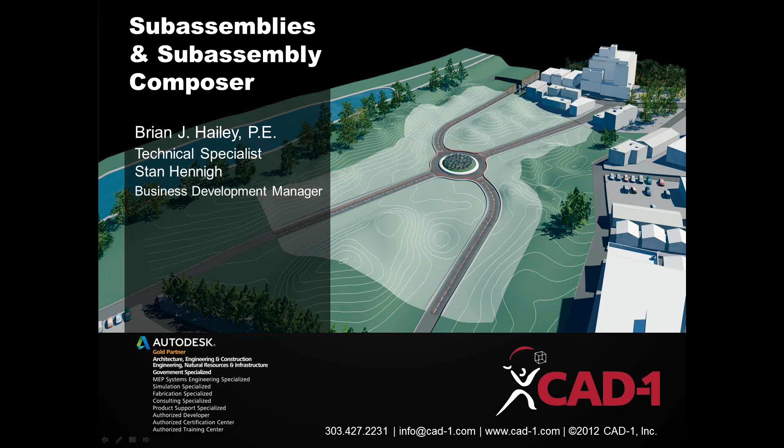That's right. So we're going to get started here. We have a few housekeeping slides to get us started, and then we will jump into the heart and soul of things.

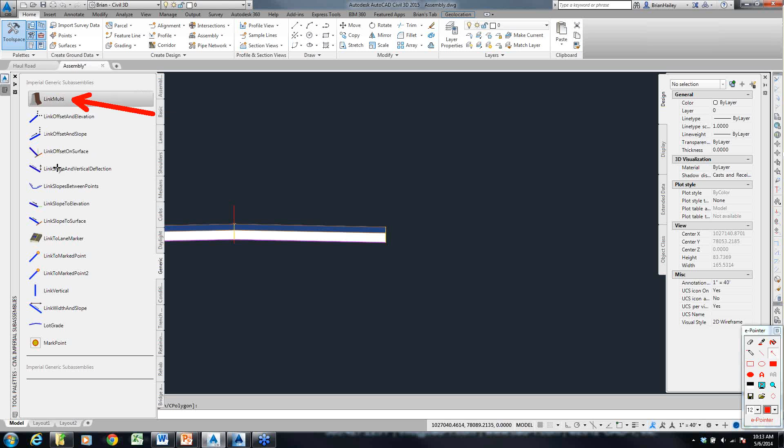So on your tool palettes, on the generic tab, what we have is the multi-link subassembly. This one's pretty cool. Let's see. So I select it. Over here in my properties, I basically just tell it how many links I want, and then width and elevation, change in width and change in elevation for it. So I'm going to put in 6 links. This is how my berm is going to look. I can type in the codes and things like that. And then, honestly, I just put in my first one.

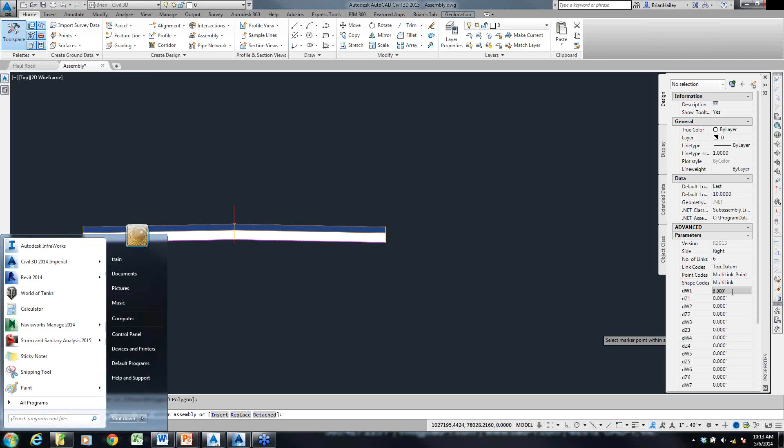So this is going to be 6 foot wide by 6 feet. Come on. By 6 feet tall. And I'm going to finish putting the rest of these values in after I attach it to my assembly, just so I can see it. So I'll go ahead and attach that off the edge of the lane. And so there's a 6 foot wide 1-to-1 slope. Now that I got it in here, I'm simply going to grab it and start making some changes here.

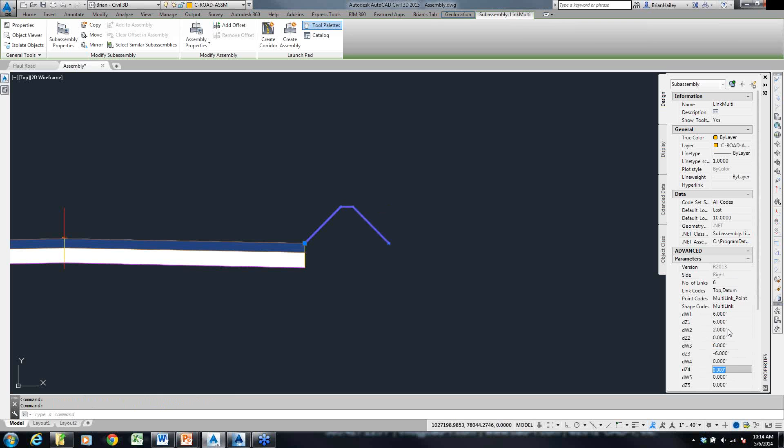So the top of the berm, I want to be 2 feet wide. All right. The next one is going to be 6 feet wide and go down 6 feet. And now I want to go straight down, so I'm going to go offset of 0. All right. Oh, sorry. Offset of 0 with a change in elevation of 4 feet. And then I'm going to go back. So I went over 6, then 2, then 6. So I'm going to go back

14 with a change in elevation of 0 again. And then I want to go back up the 4 feet, back up to where I was. And I did, oh, that was wrong. That should have been 0. Sorry. That one should be 4.

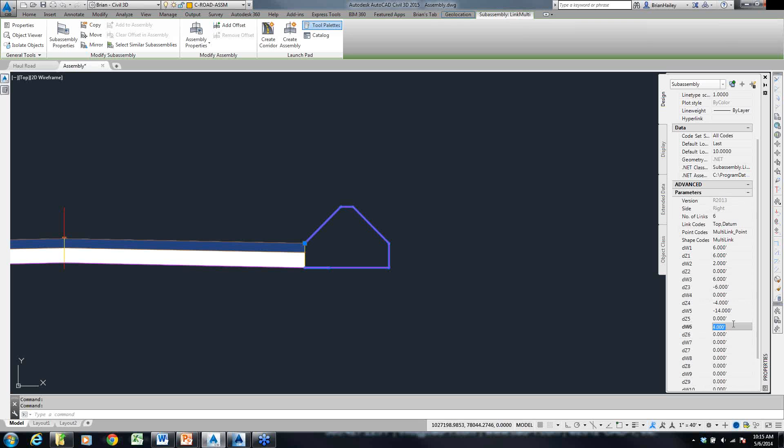No, that one should be 0. That one should be 4. There we go. And once I get back to the beginning, you can see it fills in the area with the shape. So this is one method of creating an odd-shaped subassembly. It's pretty straightforward, nice and easy.

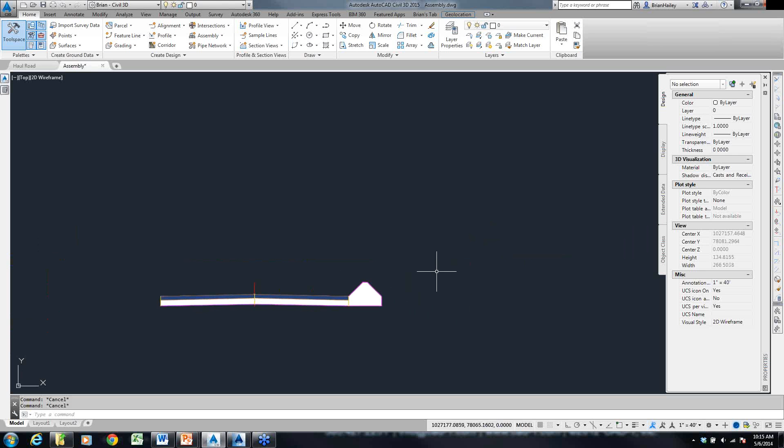I'm going to show you another way real quick. So another way is I can simply draw a polyline. All right, so let me go ahead and draw my polyline in here.

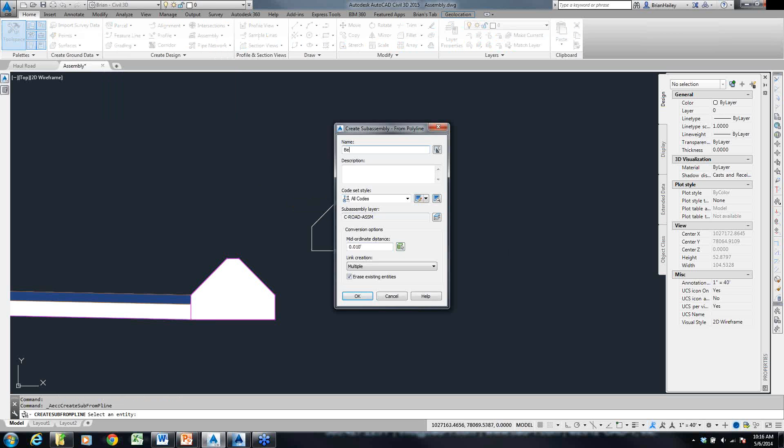All right, so I got this polyline here. It's just a polyline. It basically represents the same thing. And what I'm going to do is I'm going to make this into a subassembly. So on the Home tab, Create Design, I can create a subassembly from a polyline. All right, grab the polyline. You get some options in here. I'll call this one berm or whatever you want to call it. And now it's a subassembly.

Now, when you're doing the subassembly from the polyline, you have to go in yourself and add in all the codes. Oh, and besides that, you can see that the attachment point is right there. No. It needs to be over here. So I'll go modify the origin, make sure it's at the right spot, and then I can come in here and I can start adding codes to this.

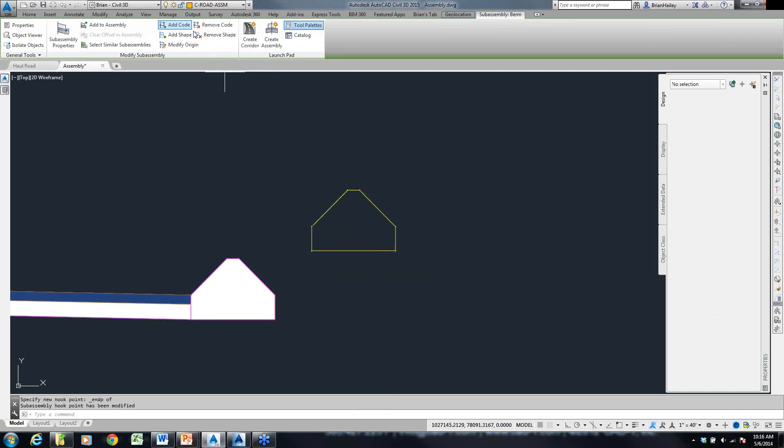So along the top is going to have the top code, so I'll call this the top code, and I want that link there to have the top code. And then I want this link to have a top code, and then I want this link to have a top code. And then I could also add point codes and things like that.

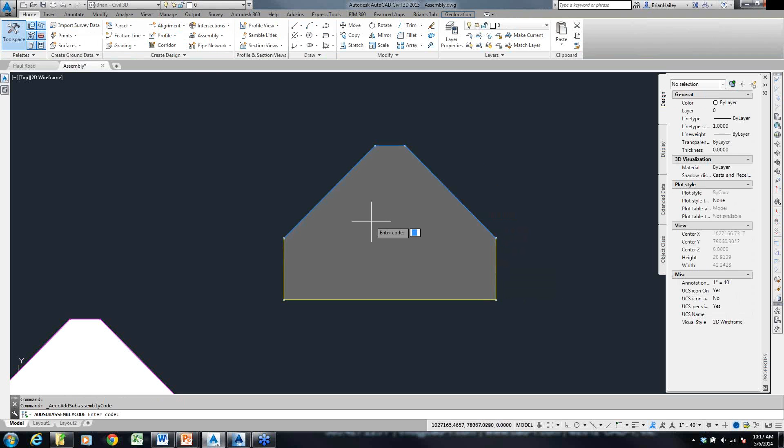I want to put a shape in here, so I can tell it, hey, I want you to have a shape. I select the links that form the shape. And then I can add a code to the shape as well. So this would be dirt. I know that's not a good code because technically it's not dirt, it's soil. All right. And now if I go into the subassembly properties under the codes, you can see I've got my top code. I don't have any point codes because I haven't added any. And I've got my dirt shape code.

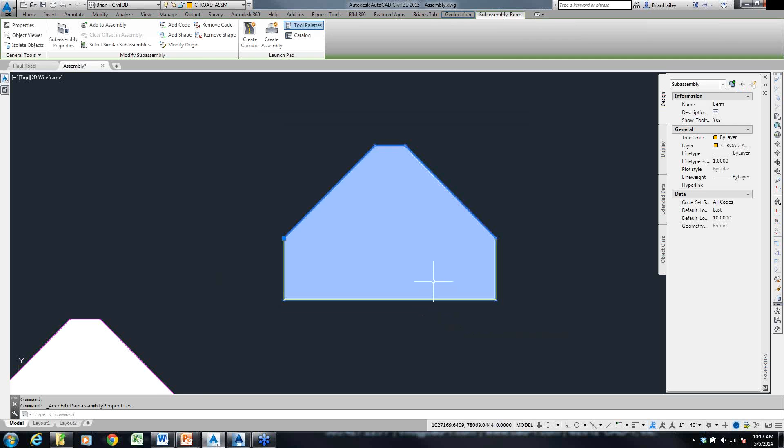Right. No, I don't refer to it as cement. Cement is an ingredient in concrete, even though I do refer to dirt as dirt.

All right, so there's a couple of different ways of creating subassemblies. Again, these are real quick, real easy. The next method is just to use your generic links.

I was hoping you'd name your subassembly Joe. Call it Joe Dirt.

So I'm going to use generic links. So I'm going to come over here to the other side, and I'm just going to use a link width and slope. All right, so my width is going to be 6 feet. My slope in this case is going to be 100%. And I'll attach it here.

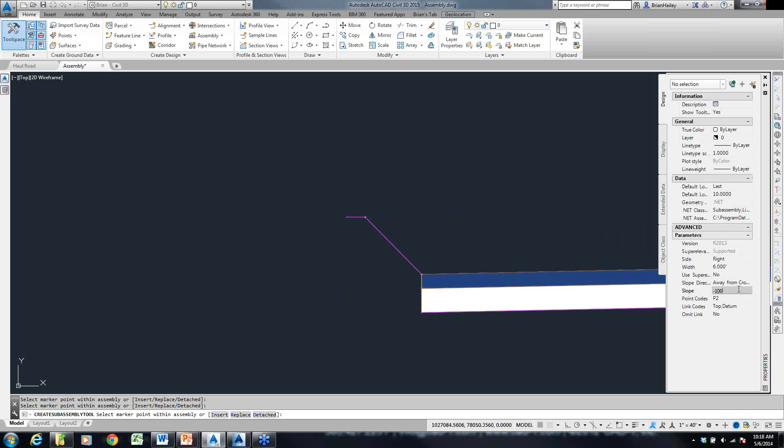And you can see I can simply start building out my subassembly. This is going to then be 2 feet with a slope of 0. And that attaches right there. And then again, we'll go 6 feet with a slope of minus 100%. And so I can start building out my subassemblies. Now, there's advantages and disadvantages to all of these. Let's talk about some of those.

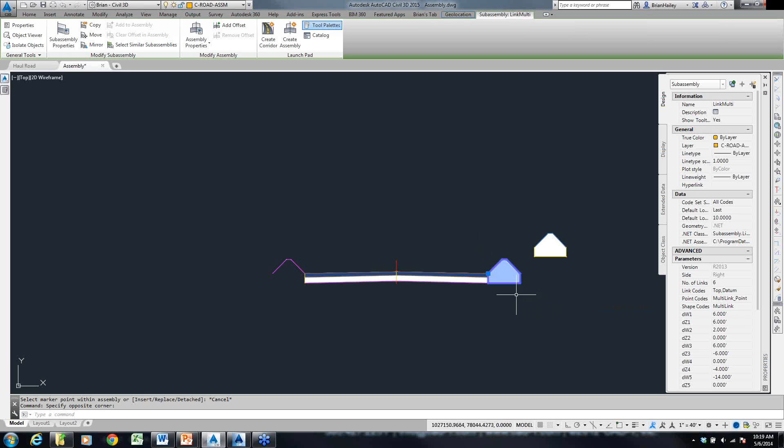So here I've got the multi-link subassembly. The advantage to this one is it's really easy. A disadvantage is, well, it only has one set of codes. So all of the links have the same code. All of the points have the same code. I can't put in multiple codes. I can't define this is top and this is datum because, well, they're all going to be the same. So that's the disadvantage of it.

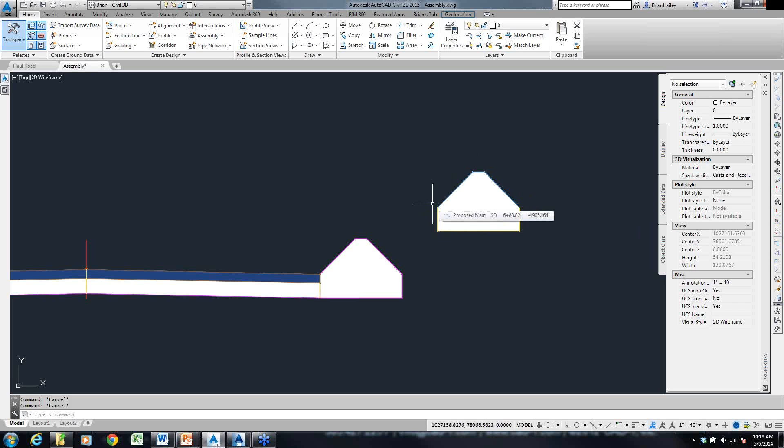Here's the one created from the polyline. The nice advantage about this one, again, it's easy. The other advantage is I can put multiple codes. I can assign different codes to the different links and the different points in this case.

Right. The main disadvantage to both of these, both the multi-link as well as the create from polyline, is they're not parametric, which means they can't change. So if I need to make the top wider in certain areas, I can't do that because they're static. They're not parametric.

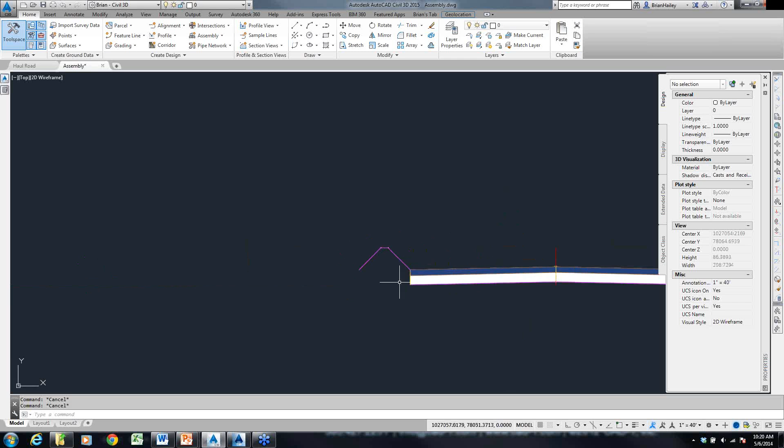The advantage to the generic links is it's fully parametric. I can change widths and elevations and all sorts of fun stuff like that. Disadvantage, I can't put a shape in here.

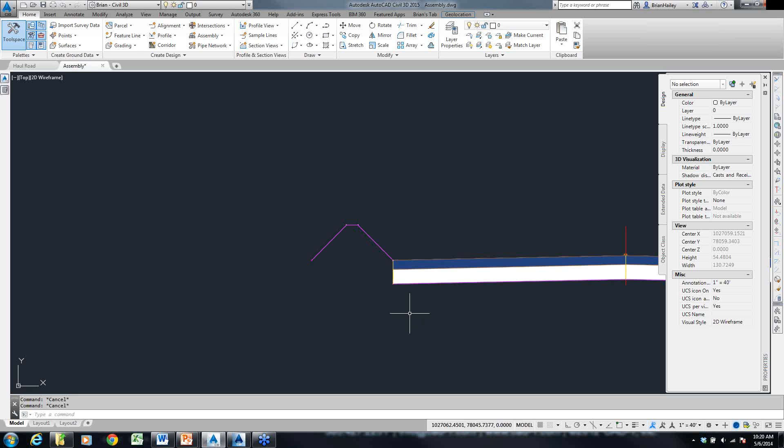And Brian John has a question here. What if your subassembly is double shape, i.e. below is a subbase when using a polyline? So, John, the question, I believe, is what happens if I wanted another piece underneath here? I have quick yes or no?

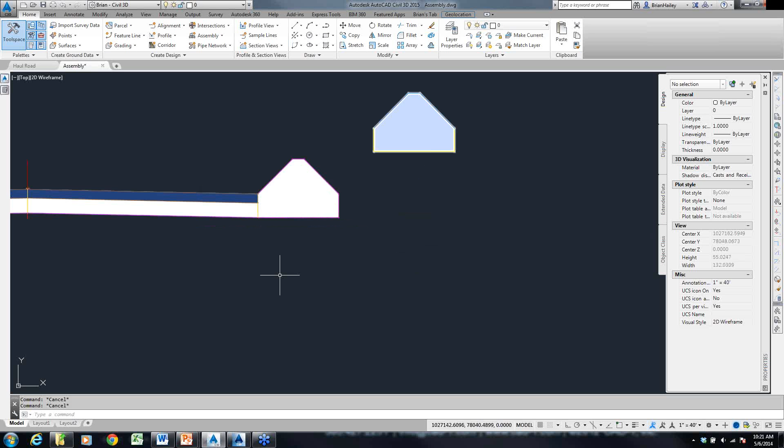All right, so that would be another subassembly in this case. So I'm creating it from a polyline. A polyline can't split. So I'd have to create a sub-base piece under here as its own subassembly. Good question, though. So that's another disadvantage to it. The same with the multi-link. It has to be one enclosed area, I believe. Never tried it otherwise. But again, the disadvantage to using the generic links is no shape areas.

Okay, we got another question. Hang on, let me read it here real quick. Okay, Jeff asks, I want to create a basic lane so that the slope from center out will tie into existing surface. I want the lane to show up as shape in section as a solid. And then, yeah, we saw that, but we won't hold it against you, Jeff. I want to create a basic lane so the slope from center out will tie into the existing surface. I want the lane to show up as a shape and a section as a solid.

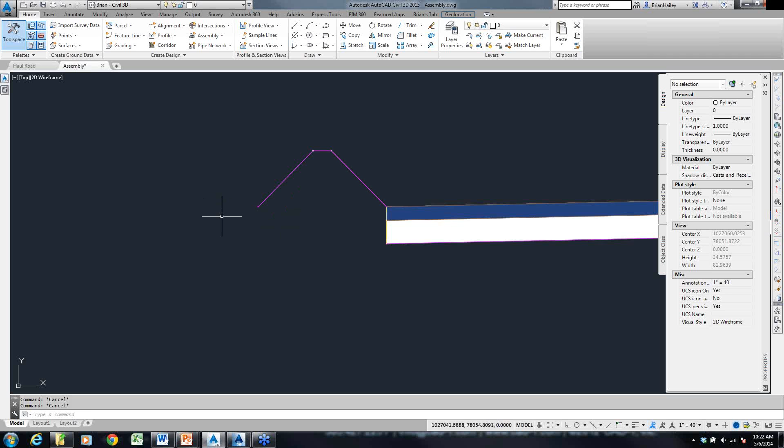So in that case, Jeff, what I would do is I would just use your basic lane. And then I would also use a link to surface. And you can get an output from the link to surface and use that as an input to the lane. It's a little bit outside the scope of this discussion, but it definitely can be done. So if you go into your assembly properties, just real quick, let me show this. All right, on your construction, you have output values. So you can get a slope and a width from an output value and use that as the input value for a lane.

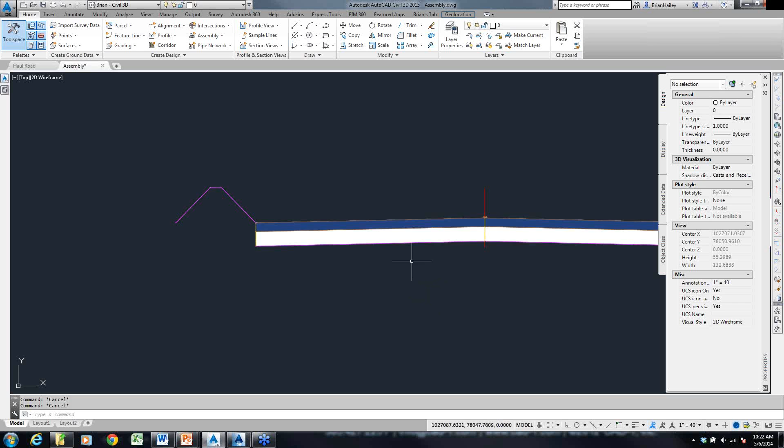So, all right, let's hold off on questions here for just a bit. Let me get into a little bit more. Go ahead and type in your questions, and we'll address them in a minute or two. So if you ask a question and I'm not answering it right away, just don't hold it. Nothing personal. He is ignoring you. He's that way.

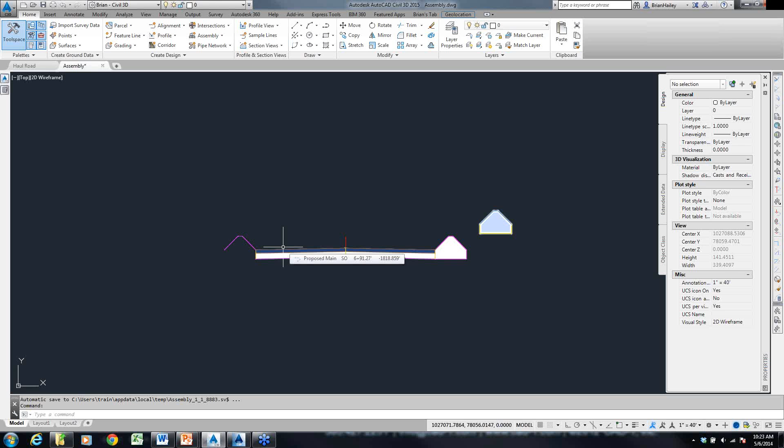All right. So here are just basic in the drawing, no subassembly composer. I want to create some subassemblies. Now, what I'm going to do is get into the subassembly composer. It looks scary. It's foreign. It's weird. It's odd. It's a flow chart. That's really all it is. You start at the start and you work your way through. That's all there is. So in this case, I'm going to do something a little bit different with my little earthen berm there. So I made up some criteria for it.

So here's the criteria. If I'm in a fill situation and it's less than 2 feet of fill, well, let me put it this way. The minimum height I want on this berm is 2 feet. The maximum height I need is 6 feet. If I'm less than 2 feet of fill, I just want to put in a 2-foot berm. If I'm more than 6 feet of fill, I just want to put in a 6-foot berm. But if I'm somewhere in between, I want the height of the berm to be the same as the depth of fill. So if I'm in 3 feet of fill, I want the height of the berm to be 3 feet to give me a little bit added protection for that severe drop-off.

I know it's maybe not so much a realistic real-world application, but I think this is a good example of how these tools work. So if there's any mining engineers out there, please don't actually design this way, because I just made this up last night.

All right, so basically what I'm going to do here is I opened up Subassembly Composer. It opened up a new subassembly. The first thing I have to do is tell it what it is. So on my packet settings down here, I'll give it a name. I don't want this to be Subassembly 1. I want this to be Haul Road Berm. Give it a name.

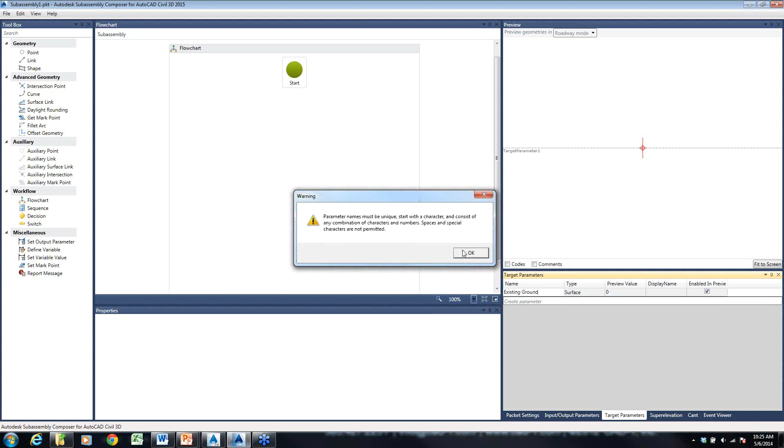And then, let's see, I got some target parameters. I need to be able to target the existing ground in this case. So I'm going to create a parameter, call it, say, existing ground. And it's a surface, existing ground, no spaces. It's a surface, and my preview value here is going to be, say, 4.5 feet. So about halfway between the 3 and the 6, right? Oh, sorry, minus 4.5. And you can see up here in my little preview, I've got my assembly, and then I got the existing ground.

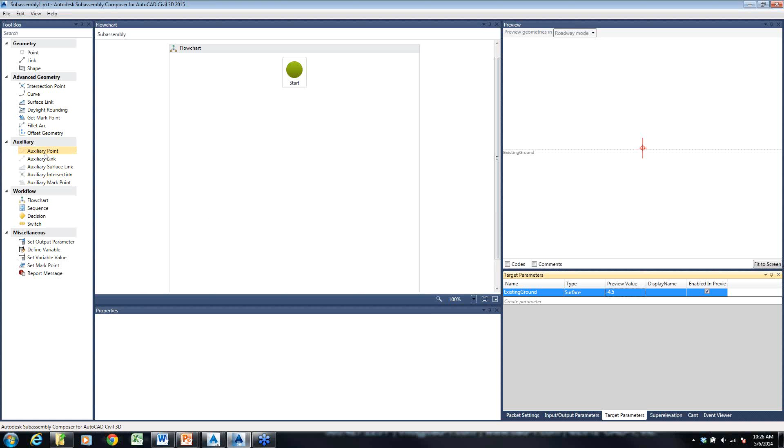So now what I want to do is I basically want to calculate the depth. How much fill am I in? So the way I'm going to do that is I'm simply going to use auxiliary points. Auxiliary points are just points that are out there that I can use for calculations. So I just simply take my auxiliary point and I drag it in. Auxiliary point 1 is going to be right there at the origin. Auxiliary point 2, and you can see it's making that flow chart for me, is going to be from auxiliary point 1. And it's going to be a delta x on surface. What's my delta x? Well, 0. I just want to see it on the surface.

All right, so if I come over here and I zoom in a bit. Oh, sorry. What did I do? Oh, I got to set my target surface. It's going to target the existing ground. So you can see I've got auxiliary point 1 and auxiliary point 2 with this link. So that's going to allow me to do math. I said math. It's cool, right? So what math do I want to do? Well, I want to know the depth here.

So what I'm going to do is I'm going to define a variable. All right, what is this variable going to be? Well, it's going to be the distance from the y value of AP1 to the y value of AP2. So my variable type is going to be a double. Again, that's a number. And my expression is going to be AP1.y minus AP2.y. So what's the elevation difference between these 2 points? And I did something wrong. Oh, no, I'm sorry.

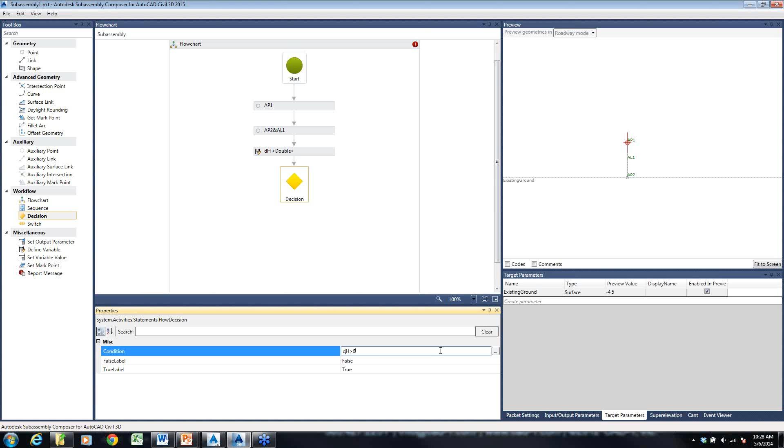So what is the decision? Well, the first decision I want to do is the elevation, is this DH more than 6 feet? So the condition is DH is greater than 6 feet. All right, and then I got a true and a false. So as I mouse over this, you can see I got a true branch and a false branch. It's a flow chart. So let's see, what do I want to do here? And I just start building this out.

Now, the way I'm going to do this here is I'm actually going to put in another variable. I should have done this before. All right, I'm going to go put in another variable here. I'll just define another variable. I want it to be between here. Now, what it did is it went from the true up to here. I don't want that. I'm going to reconnect some of these things. I can just erase these, and then I want to go from there.

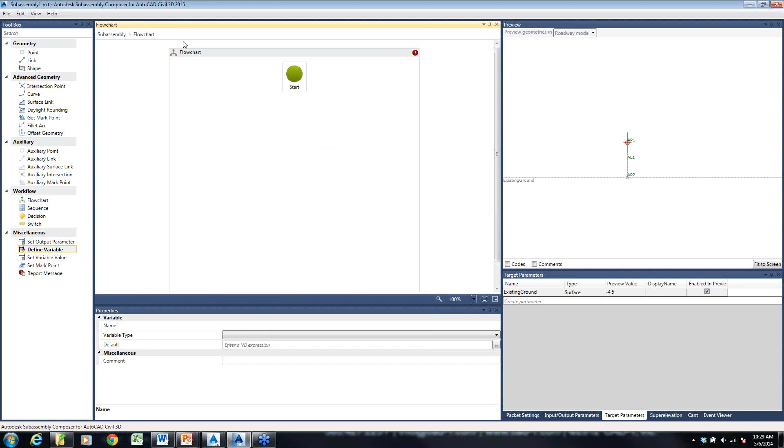Go from there to there, and then I want to go from this variable to my decision. This variable is going to be berm height. Variable type is going to be a double, and my default is going to be 6.

So if it's that, I'm setting the value here. If this is greater than 6, well then I don't really need to do anything, but actually let me set a variable if it's true. If the variable, just to make sure, I want the variable to set is berm height, and I want it to be equal to 6.

If it's false, I want to put in another decision. So I'll get rid of that, and then I'll connect the false to the input here. And I can always rearrange these and try to make them look a little bit better maybe.

So again, in this case, my decision is going to be, is DH less than 3. If DH is less than 3, again I'm going to put in a variable. And this time the variable is going to be berm height, and it's going to be equal to 3.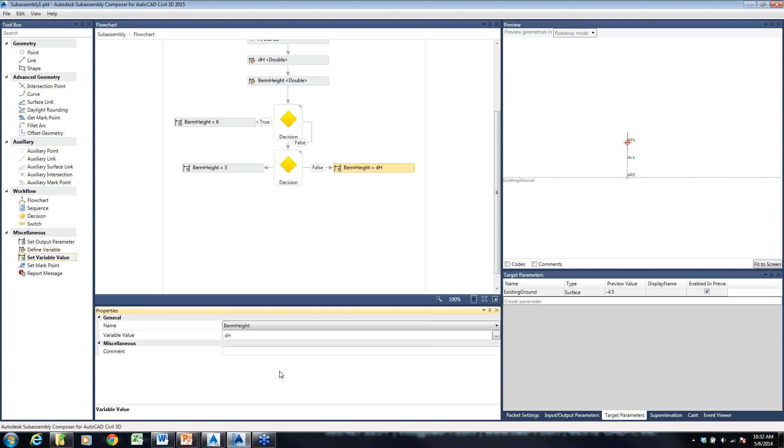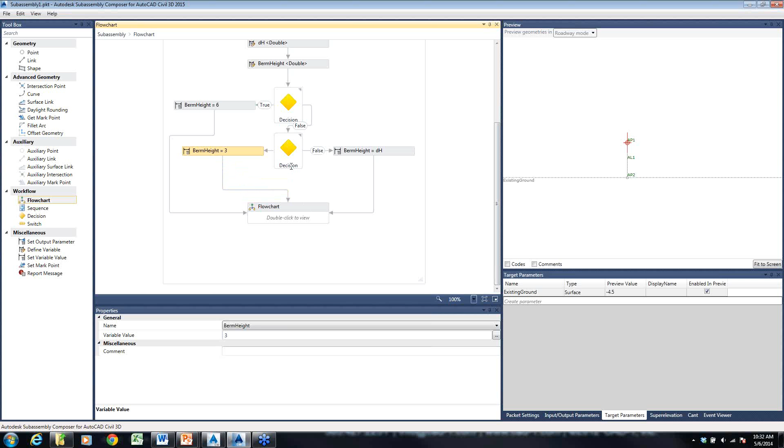Now I've got everything set up, I can now go in and define the actual geometry. And the way I'm going to do this is I'm going to put in another flowchart, just a simple flowchart. Now I want all 3 of these to connect here. So I'm going to grab this one, and we'll connect to the flowchart here, and we'll connect this one. So no matter which path I go, I end up here, but I end up here with different variables.

So now within the flowchart, I simply start putting in my geometry. So I'm going to put in a point. Where is this point? Well, it's going to be at the origin. I put in another point, and as I drag in the next point, this is now going to include a link. And down below, what is my delta x going to be? Well, I want it to be equal to the berm height.

I want to go over 6 feet, up 6 feet. So my delta x will be berm height. There we go. And again, over here in the preview, we can see it starting to work. And my delta y is also going to be berm height.

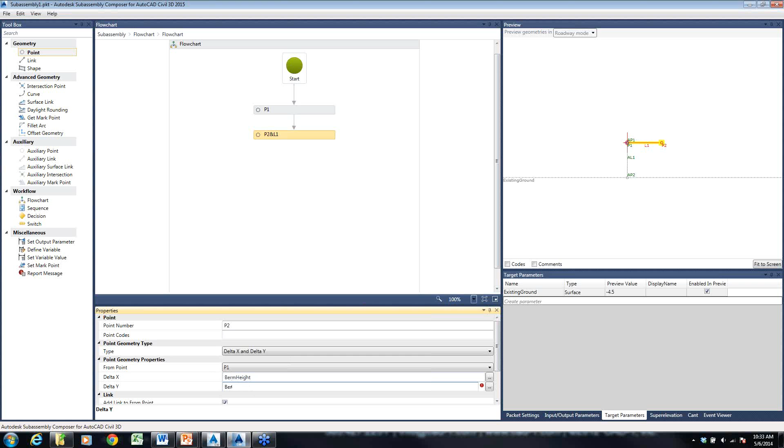Put another link in. I want this to have a 2-foot top, so this delta x is simply going to be 2. Put in another point, and I just start working my way down. This one, the delta x is going to be berm height, and the delta y will be berm height times a -1. All right, now this is where it gets a little fun.

I want to come down my base depth. So I created this base depth input parameter. I want to come down that distance. Now, what happens if they put in a positive number or put in a negative number? Well, I don't care which way they put it in. I want it to always go down. So for my next link, again, I'm going to do some math. And I even actually get to type math, so this is awesome.

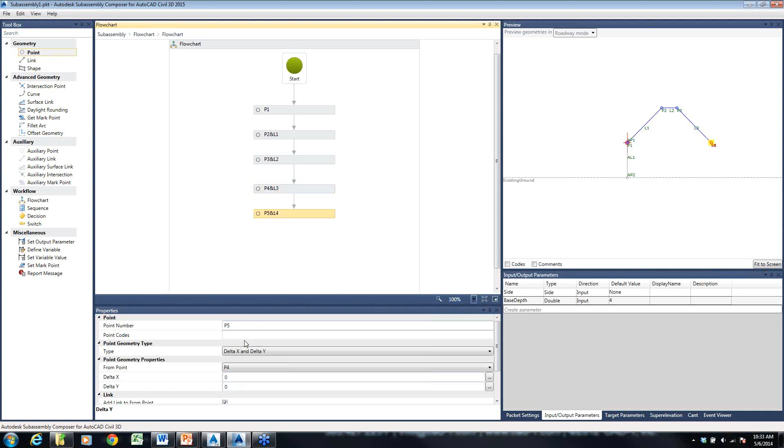All right, so my point 5, my delta x is going to be 0. My delta y is going to be math dot absolute value of base depth times a -1. So no matter which direction I typed it in, I want to take the absolute value of it, and I want it to go down. And it goes down the deep 4 feet in this case.

And now one more point. This is going to represent coming back over to this side. This delta x is going to be 2 times the berm height plus 2. So it's going to be berm height times 2 plus 2. Wrong way.

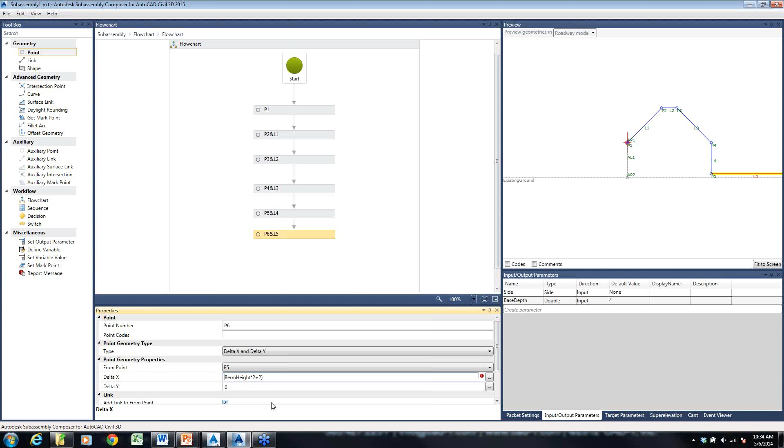Times it by negative one. Now all I want to do is put in one final link, and that'll connect back up to the beginning. So this one I want to go from point and go back to the beginning. So there's my links. Now I can go through and put codes and all sorts of fun codes on these.

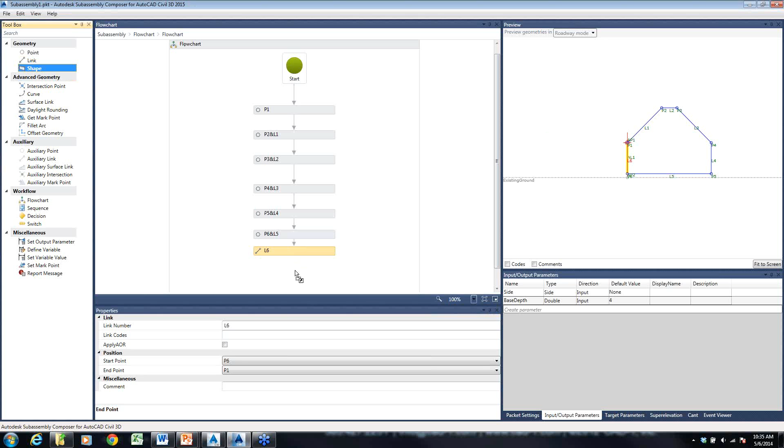One last thing I do need to do is I do want to put in a shape. And this shape is going to be composed of this area right there. So I click that point, and it allows me to put in my shape.

Now, how's this going to work? If I change the existing ground here, I can actually take this and drag it up and down. As you can see, as the ground gets deeper, the berm gets higher until I reach a certain point, and it stops. As I start moving up again, the berm gets lower until, again, I reach a certain point, and then it stays at that minimum height.

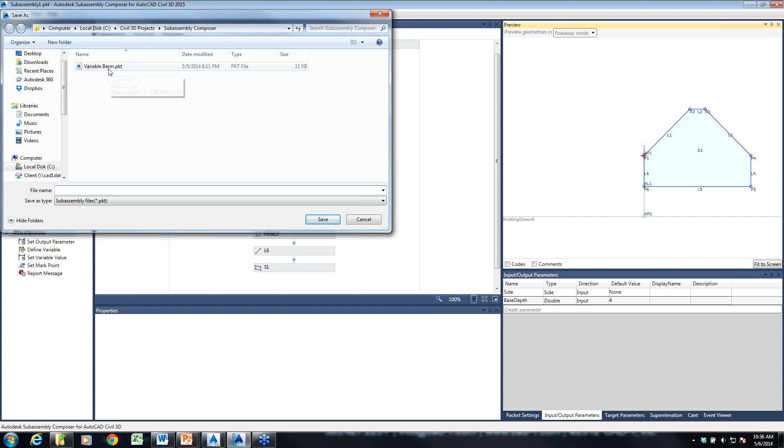So let's go ahead and take a look at this actually in Civil 3D now. Oh, sorry. First of all, what I have to do now is save this as a PKT file, as a packet. So I do a save as, and save it as a packet. I've already got this variable berm packet in here. This is the one I'm going to use in Civil 3D.

So now I'll come over to Civil 3D. I've got this nice haul road, and here is that subassembly brought into Civil 3D. And what I did is I threw in a couple of conditionals, to make sure that this is only put in a fill situation.

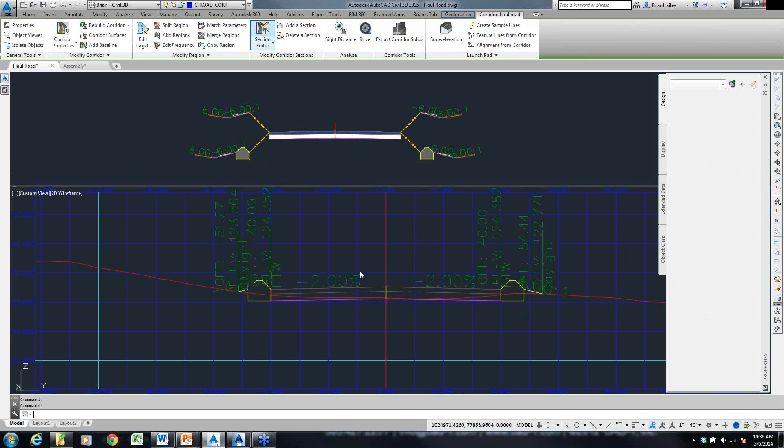I'll come down here and take a look at my section editor. As you can see, here is the berm, and what I'll do is I'll make sure I'm always zooming to this offset and elevation. And as I step through...

Must be going the wrong way. There we go, that is the other side. Let's take a look at the other side. I think the other side works better.

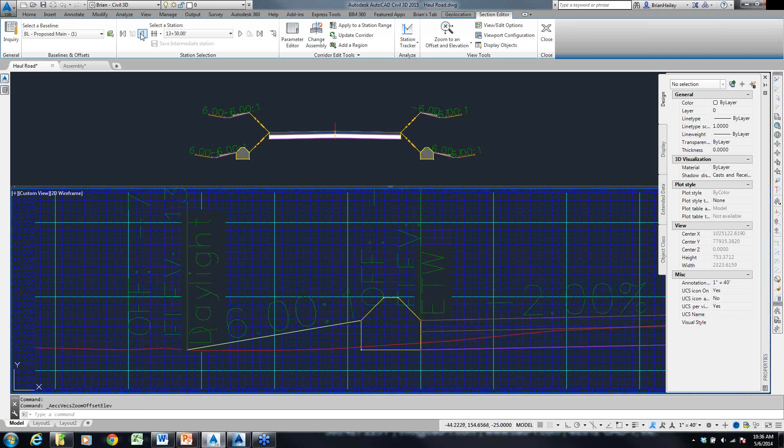As I go through the section here, you'll see that berm get bigger and smaller. As it gets more fill, you can see that berm start to grow out. It doesn't seem to be real obvious here.

Let's go ahead and close out of this. I thought I had this a bit more. Let me do something here real quick. Sorry.

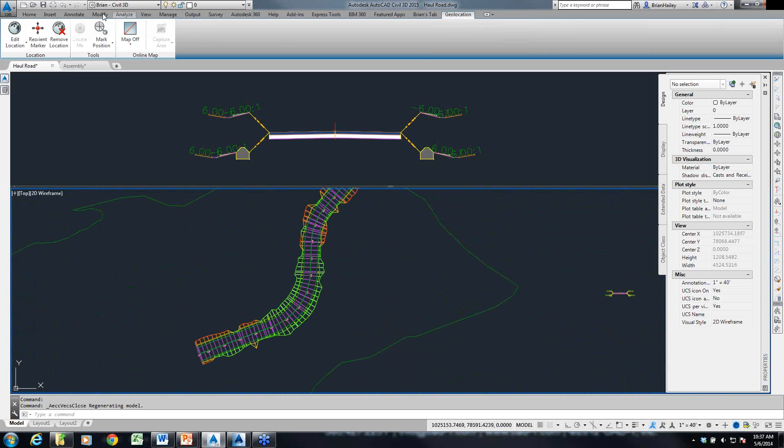Yeah, we should have lots of fill there. Am I just not seeing it?

All right, I'll start here. One more time, section editor.

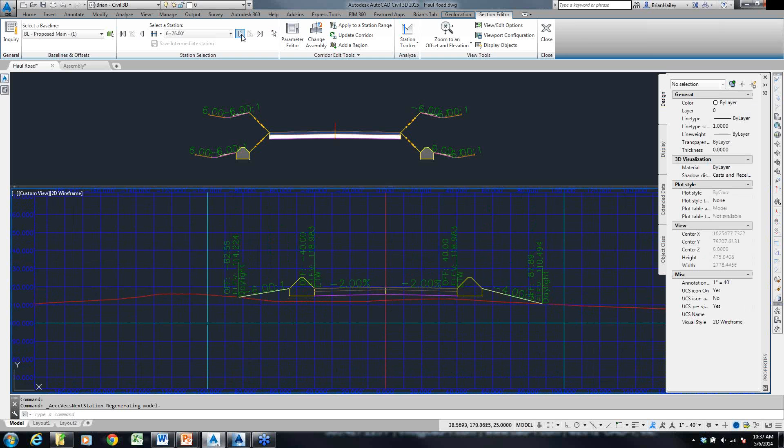As I start stepping through this, you should see that berm start to get wider and taller. There we go, it's getting wider. And then it'll start getting smaller again. So it's all dependent upon the depth of fill. So there it is at its max. As I continue to step through, it'll start to shrink again once we get less fill. There it is down towards this minimum.

Now, Brian, get closer to the mic here. I can see what you meant by there's lots of times you don't need the subassembly editor or composer, but I can see some real value to creating consistent subassemblies perhaps for your organization and so forth. What do you think are the times where people most could use a subassembly composer in an organization?

I think they're not really going to create a set of subassemblies for the organization. These are going to be more project specific. On this specific project, we've got this thing going on, I need a subassembly that does this. Not saying that that's not always going to be the case, but that's where I see it being used the most.

Yeah, so it's definitely going to be a project-based type of thing, and like I said before, it's going to be those situations where you've got to do math. If you don't have to do math, you can probably get away with using other methods.

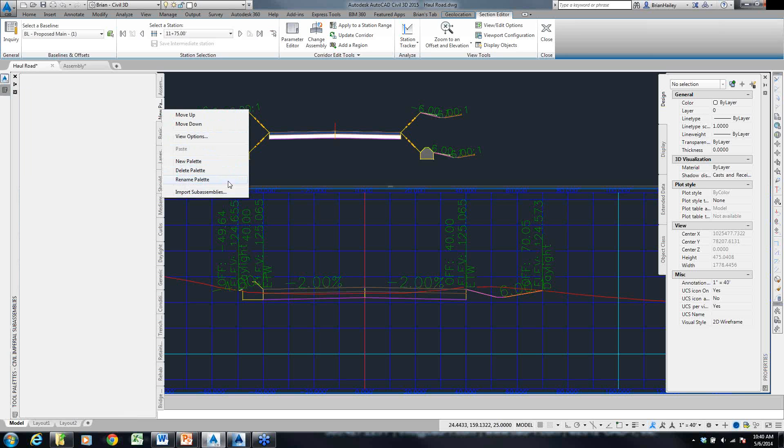All right, name it whatever you want, then right-click on the palette name and import the subassemblies. You can browse to that PKT file, and hopefully you've included an image in it so you actually see something there. And there is that haul road berm that I created earlier.

All right, we've got a few questions. Are you ready to go ahead and tackle them right now? Absolutely. Okay, Jacob's question goes back to earlier in the session.

He asks, is it possible to change the origin of a multi-link? Let me switch back over here real quick. So I've got the multi-link - is it possible to change the origin? No. Basically, your dW1 is where the origin is. So if I wanted the origin to be up here, I would just need to start putting in this list as though I'm starting here. You just need to do it in the order that this is done. So the dW1 and the dZ1, that is going to specify the first point from the origin. So it all depends upon where you start this list at. So a little bit of planning is at hand there.

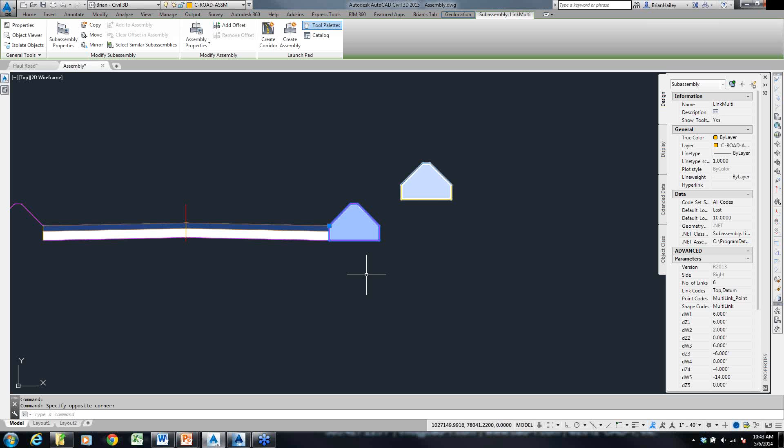Joe asks, are there any out-of-the-box subassemblies, berm or walls, that use this kind of internal logic to establish the berm height? Not that I know of, Joe. This variable height thing I was showing here, where the size changes based off of the depth - again, this is doing math, and none of the out-of-the-box subassemblies really do this sort of thing that I'm aware of. That's kind of why I chose this example.

All right, David has a few questions here. First question, are the custom subassemblies backwards compatible, like 2015 to 2013?

I don't know, I haven't tried. Unfortunately, I don't have an older version on this particular computer, so I can't try it, but that's something I'd have to look into. My gut tells me that they might be. I'm not going to say they are, I'm not going to say they aren't. No, I'll take that back - my gut is just upset. That's been something I ate this morning, so ignore my gut.

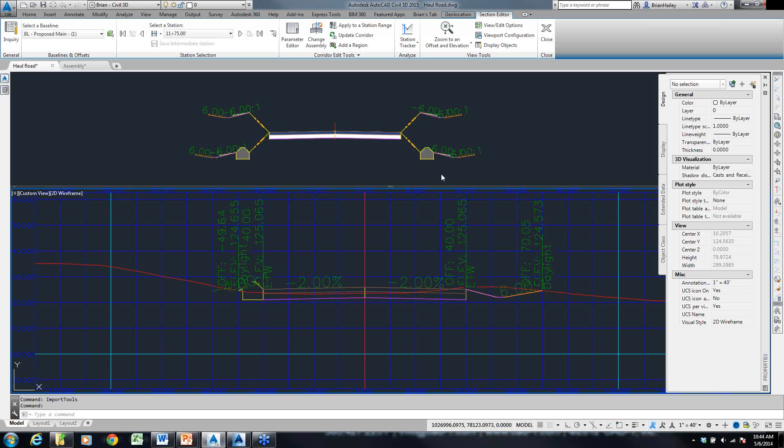All right, again, do you have a sample for report message? So the report message, I'm assuming you're talking about this here. What I could do is put in a test. So if I go back up to my flow chart, I can put in a decision that says, hey, is the DH less than 0, which in this case would mean that we're in a cut situation. And in that case, I could put in a report message saying this subassembly shouldn't be used for this situation, and it would show up in my event viewer for the report message.

Okay, and then last, does having vertical links in a subassembly create a problem with your corridor surface? Ooh, that's a good question. Does having vertical links in a subassembly cause issues with a corridor surface? It depends. If you've taken one of my classes, no, it doesn't, because you know what to do. Because this is something I always talk about in all of my classes.

So if I were to create a corridor surface here, and I'm just going to create one here real quick. What you should always do whenever you create a corridor surface is put in an overhang correction. I don't care if there are overhangs or not. Always put in an overhang correction. Which one should you put in? If you don't know, it doesn't matter. Put in a top link, put in a bottom link. I don't care. At least put one in.

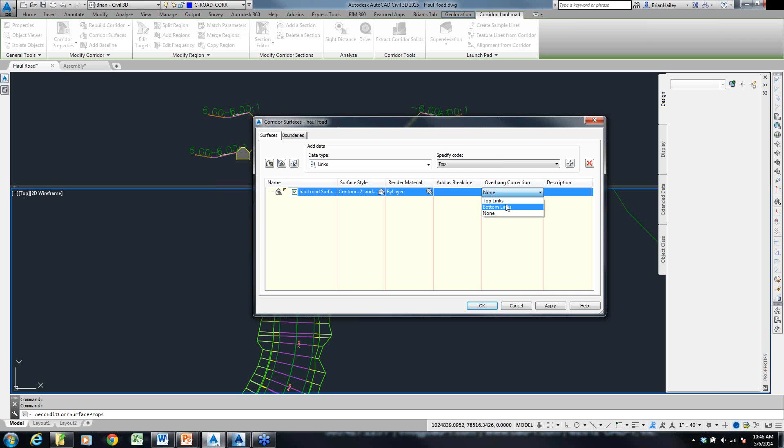All right. Well, Brian, we don't have any more questions right now. Do you have anything else you wanted to show? No, that pretty much covers it. Well, I'll hang out here for a few minutes to answer any questions.

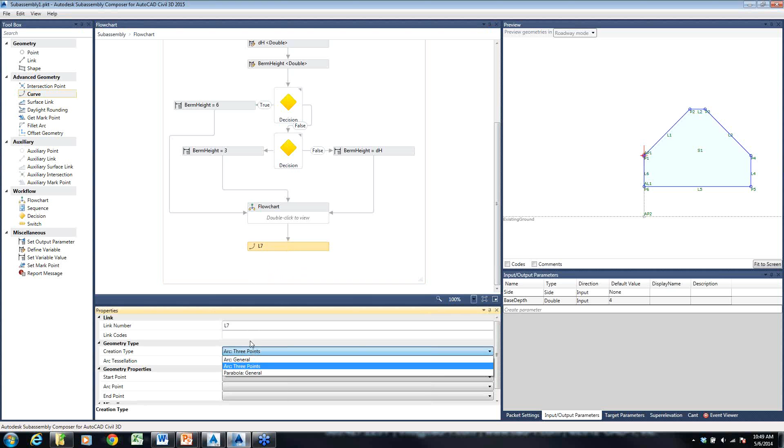Daylight rounding, so if I'm doing a daylight, I can put in the little rounding to make it not quite so angular. Surface link, I link to a surface. Curve, now subassemblies can't have curves, so this actually puts in a bunch of little line segments. Again, if you want to add it, you add it in, and then you fill in the properties of it. So this could be an arc general, 3-point arc, or a general parabola. And then I get my arc tessellation and things like that. So you just drag and drop the pieces in, and you go from there.

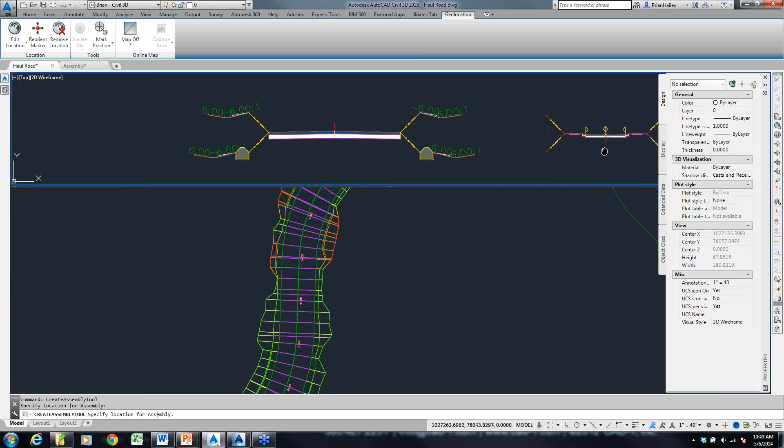Okay, Scott asked, could you spend some time on overhang correction? Overhang correction. Let me, oops. No, I don't want that one. That was a basic. Don't use basic. Use the primary road. Where is it?

Oh, there it is. That's what I was looking for. All right, overhang correction. So if I create a surface out of my datum links, where are my datum links? Well, I've got a datum link that runs down here on the bottom of my lane. I got a datum link that runs here for my curb and gutter, and I got a datum link that runs here for my daylight.

Problem is right through here, that's not the color I wanted, I actually end up with an overhang of two different assemblies, or two different links. This is bad. We don't like this. So my overhang correction basically says, okay, which one's right? Because what happens if I don't do anything here? I end up with a surface that does something like this. Have you ever seen that? So it just goes from datum point to datum point to datum point.

And so an overhang correction will come through and say, oh, we got an overhang, which one's right? Well, the top links are right. And it'll do that. All right. Or it'll come along and say, oh, you got an overhang, which one's correct? The bottom links are correct. And so it'll do something like that, which is a lot better than this thing. I should say so. So that's overhang correction in a nutshell.

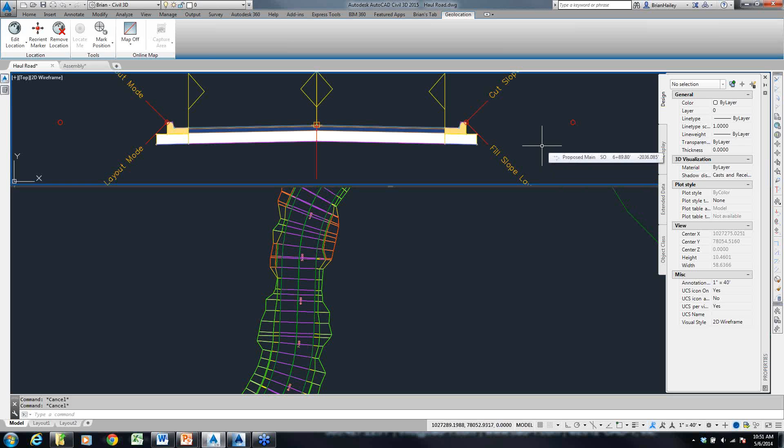John asks, can you explain coding in a polyline? So, John, I'm assuming you're talking about adding codes to a polyline. So, yeah, you just grab the subassembly created from the polyline, and then you add the codes that you need. So do you want to use a top code and a datum code? Do you want to use a daylight code, a hinge code?

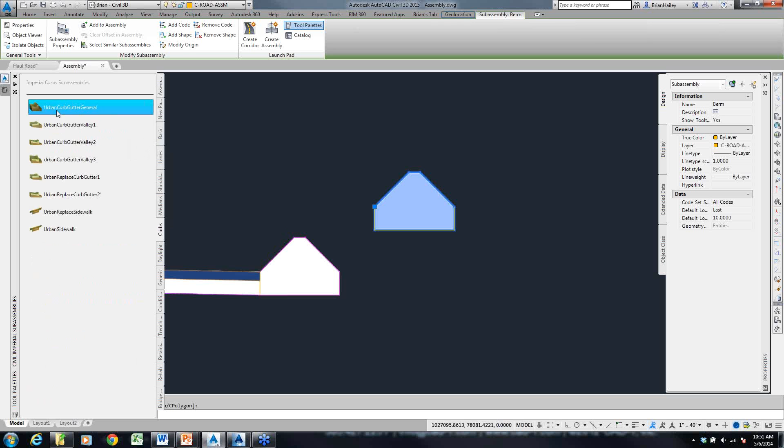So if you go into any of your other subassemblies, so I'll just go to my curb subassembly here, go to the help for it. And I scroll down to the bottom, you'll have all these codes for the subassembly, right? So just using that add codes in here, you can add in those codes to your own subassembly created from a polyline.

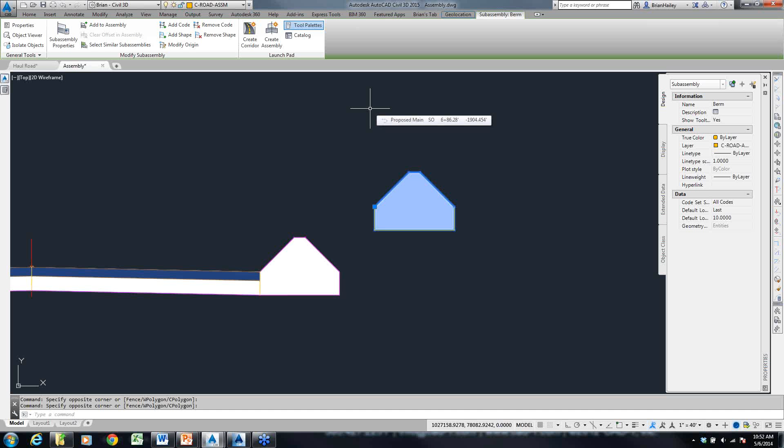Anyway, Trudy asks, we have been trying to model road turnouts and having trouble with transitioning between the normal width and the turnout. What would be your suggestions? I would use a target for my lanes. So again, if I go to the help for my lanes, so I'll just go to my help for my lane. Depending upon the subassembly you're using, do not use the basic subassemblies.

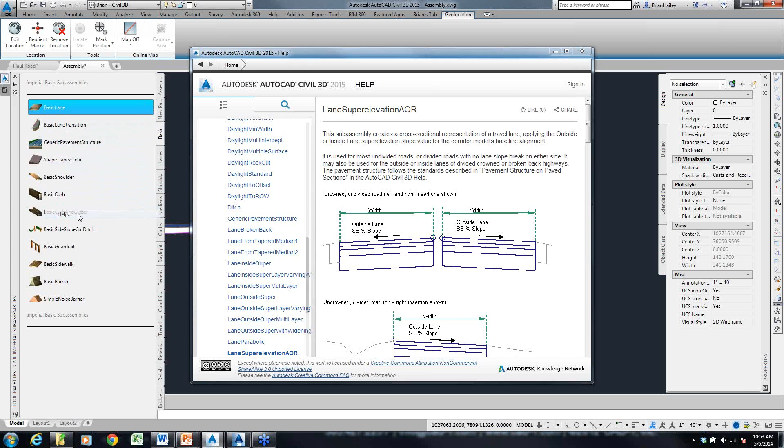I should have mentioned this. Don't use. So you got the basic tab here. All right. Don't use these. They're just horrid. Please, just don't. Why? Well, here, let me show you. Let me go to the help for the subassembly, and in the help for this subassembly, right here, it says, hey, this subassembly is one of a group of getting started subassemblies used for simple roadway modeling and for tutorial and training purposes. This screams at me, don't use this in production. So don't use your basic subassemblies.

All right, so here's my lane, and what you can do is you can have this width change based off of geometry in the drawing. So I can have this width target a polyline. So I would just draw a polyline that represents how wide I want the lane to be, and it'll just go out and target it.

And then Joe asks, are there any new subassemblies that they've added in 2015 that you want to mention? I don't know of any new subassemblies in 2015. They've made a couple of changes to Subassembly Composer in 2015. You can now create shapes that have holes in them. Like for example, if you're creating a subassembly for a pipe, and you wanted the shape that's around the pipe, you can do that now in the Subassembly Composer. But no new standard subassemblies that I'm aware of. I'm not saying there aren't, I'm just not aware of any.

Or we don't want to mention them.